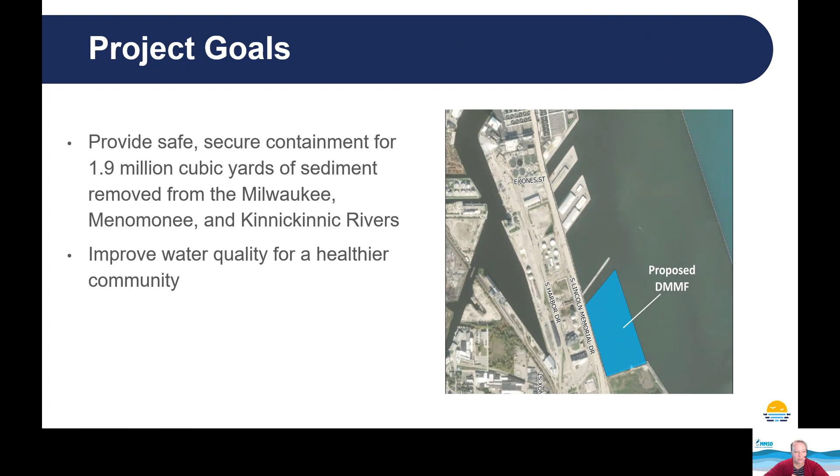The purpose of the project is to provide safe containment of 1.9 million cubic yards of sediment removed from the Milwaukee, Menomonee, and Kinnickinnic Rivers. And this will be done to improve the water quality for a healthier. The DMMF project partners include Port Milwaukee, the Wisconsin Department of Natural Resources, We Energies, and MMSD.

The proposed DMMF is located on Jones Island, south of Summerfest and the Jones Island Water Reclamation Facility. The proposed facility is just east of the Hoan Bridge and north of the existing Dredged Material Disposal Facility, or Confined Disposal Facility, as shown on your screen.

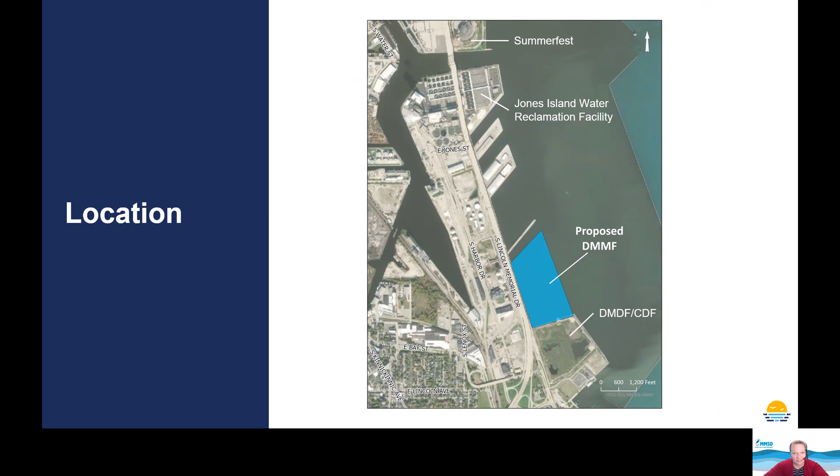The proposed DMMF is approximately 42 acres in area, with a capacity to hold 1.9 million cubic yards of material. That's 13 football fields filled with 50 feet of sediment. The elevation of the completed DMMF is going to be similar to the surrounding areas, including the existing DMDF or CDF. The size of the DMMF is defined by the State of Wisconsin's Submerged Land Grant Authority and the start of the federal government navigational channel.

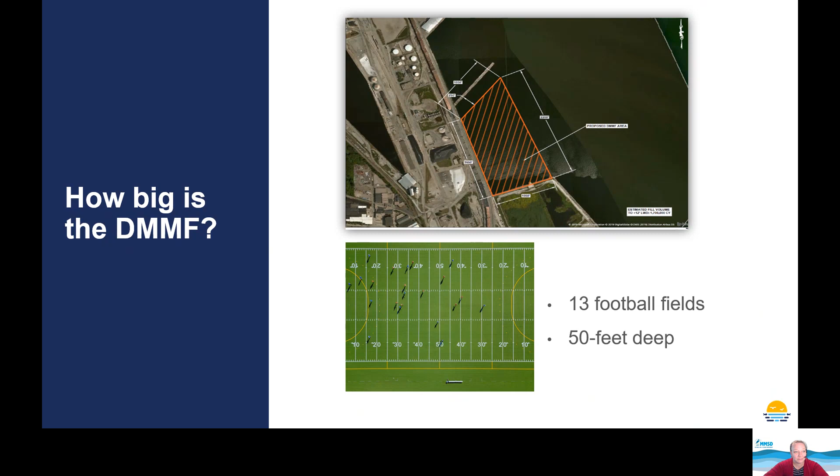Now that we've got the basis of our background of how and where this facility will be placed, let's talk about the design of the facility. In November 2020, a concept plan was developed by Foth Infrastructure and Environment under a contract with We Energies. These plans were used to develop permitting applications for the future facility. The permit applications were submitted in April 2021, and the first public information meetings were held in May 2021.

At that time, MMSD was working on changing a state statute that would allow MMSD to construct that facility outside of our service area. While we were waiting for that statute change, MMSD did a request for proposal, or RFP, for the final design work to select the final design consultant. Ramboll Engineering Americas was awarded the final design in December, and the statute was unanimously approved in January.

One of Ramboll's first tasks was to review the permit applications and the regulatory comments to identify efficiencies and improvements. An alternative design was selected in February 2022. And in July, the Ramboll team prepared preliminary engineering documents that are the basis for this presentation. Those documents will be further refined for permit applications in early 2023.

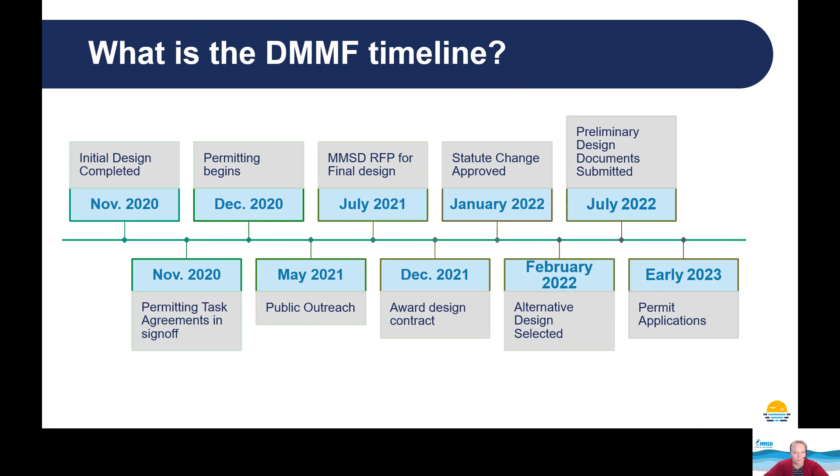The proposed design is very similar to a design that was done on Lake Ontario at Randle Reef in Canada. As you can see on your screen, the Randle Reef facility used 2 rows of sheet piles tied together with tie rods, and then the space between those sheet piles is filled with the granular material. That granular material allows for trucks to drive around the top and dump either the granular material or impacted sediment into the facility.

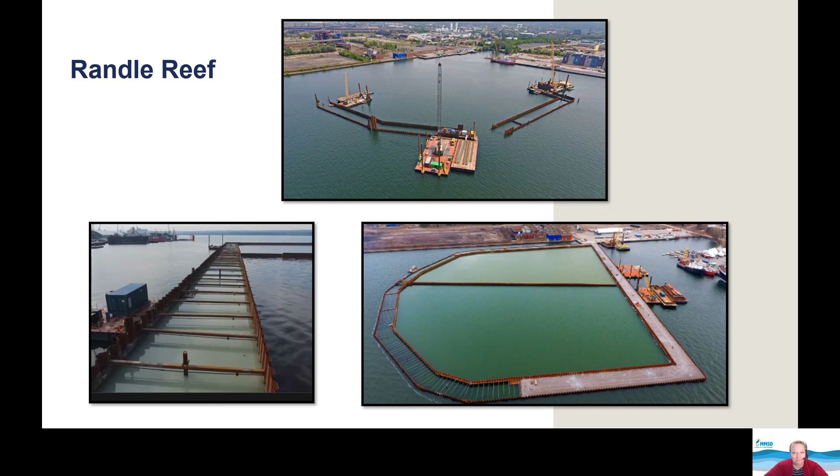While some of our components are very similar to Randle Reef, there are a few key things that are a little bit different. We are adding something called a bulk barrier cutoff wall between the sheet piles. This cutoff wall would act as an impermeable barrier between the inside and the outside of the facility. Essentially, the bulk barrier cutoff will not allow water to go in or out of our facility.

The image on the top of the screen shows one way to install that cutoff wall. The method shown is called a secant pile wall. The design team is currently evaluating that option or an in situ soil mix alternative, which basically takes the aggregate that we're putting in and mixes it with some additives to make that impermeable barrier.

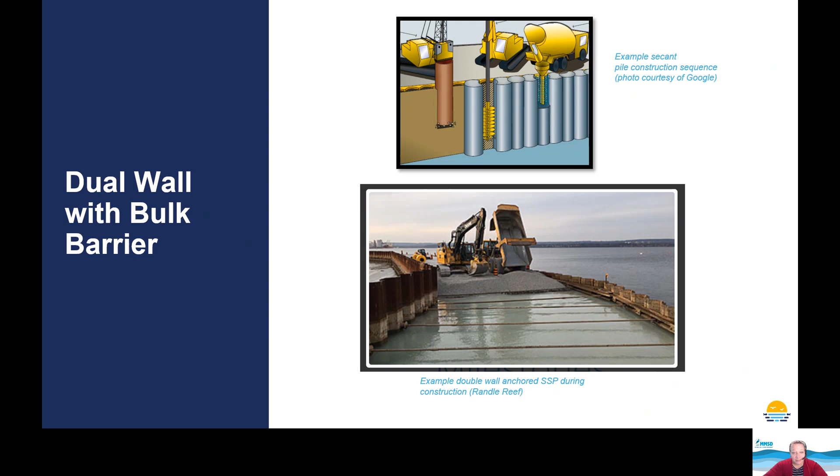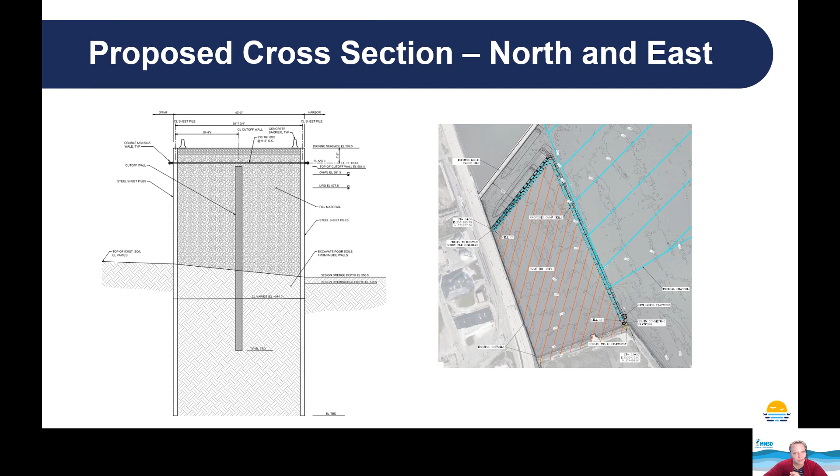The bulk barrier will be on all 4 sides of the facility. Another big difference between our facility and Randle Reef is we've only got 2 sides that are adjacent to Lake Michigan. So only 2 sides of our facility will have the dual sheet pile wall. And the other 2 sides, our west and south sides, will have something called a combi wall, or a combination wall. There will not be tie rods that hold this wall together to the existing facility. The combi wall can stand on its own, and it can also hold back all that aggregate material.

The bulk barrier would start at the toe of the existing rubble mound or the existing large rocks that are out there. So the existing facility on the DMDF side has large rocks, and then the existing dock wall also has some riprap rock that is a little bit smaller, but still very large. The bulk barrier would be at the toe of both of those slopes. And then just inside of that will be our combi wall. This structure also allows for trucks to travel around the top of the facility, so we will have a full perimeter that will allow for truck traffic.

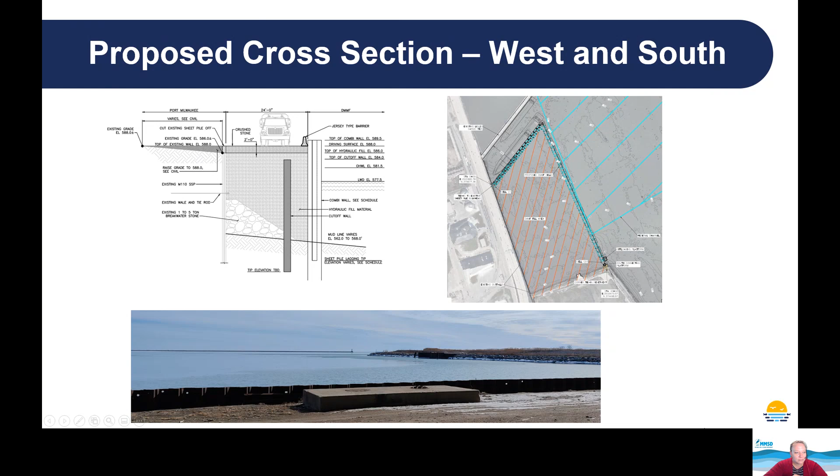Ramboll also worked with Commonwealth Heritage Group to complete an investigation of a sunken vessel within the DMMF footprint. This vessel was found to be disarticulated or in many pieces, and it likely has no historic significance. This investigation is needed as part of our permitting process to make sure that we are not filling a vessel that has historic significance.

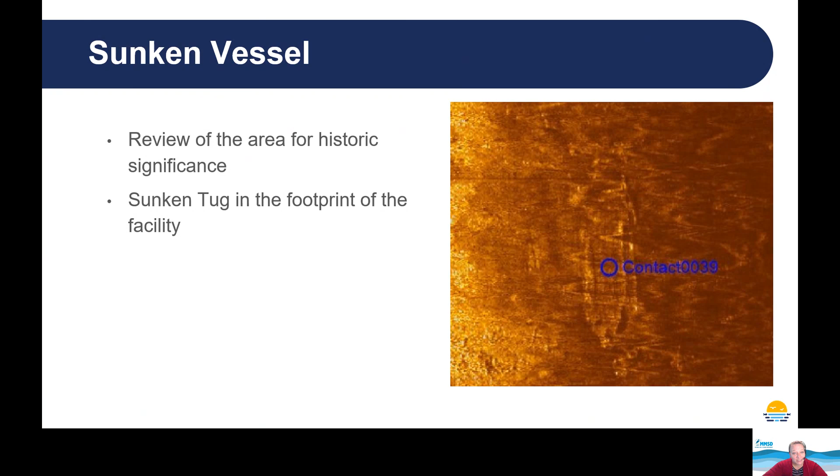So that brings us to our design to date, and where do we go from here? The Ramboll team is working towards permit submittals in early 2023 and anticipates completion of the design and permit approvals by the end of 2023. Construction of the facility is anticipated to take 2 to 3 seasons. Once complete, the EPA Great Lakes Legacy Act filling will begin. That's anticipated to take 2 to 3 seasons as well. Once that filling is complete, that material needs time to settle and consolidate.

When it is consolidated and settled, that gives us capacity for MMSD and Port Milwaukee to place material into the facility and then finish and cap it. The MMSD and Port Milwaukee filling does not have a specific date. Those would be project by project based. It is anticipated that that filling and consolidation and capping process will take 25 to 50 years. That's when there'd be usable land available along the port.